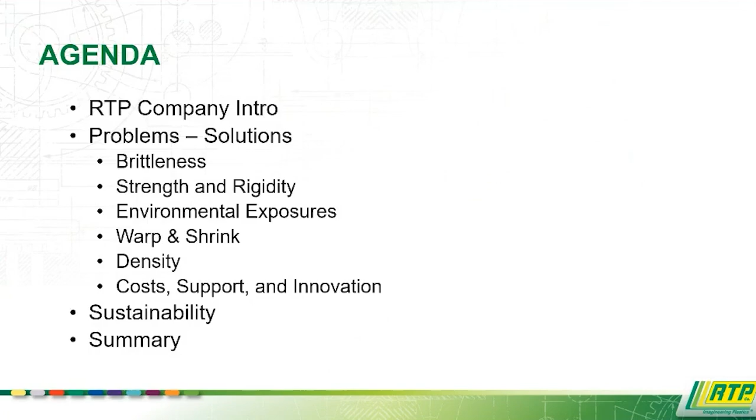So first, a little bit about RTP Company for those that don't know us. We're a global compounder of custom engineered thermoplastics with approximately 1,800 employees and $1 billion in sales. Unlike some of our competitors, we are an independent, privately held global company.

This is important, and here's why. As an independent company, we can be completely objective when looking for raw materials, formulations, and solutions to meet your requirement. In doing so, we're able to provide you with the best thermoplastic material for your application at the best cost. Being a privately held company is another important distinction.

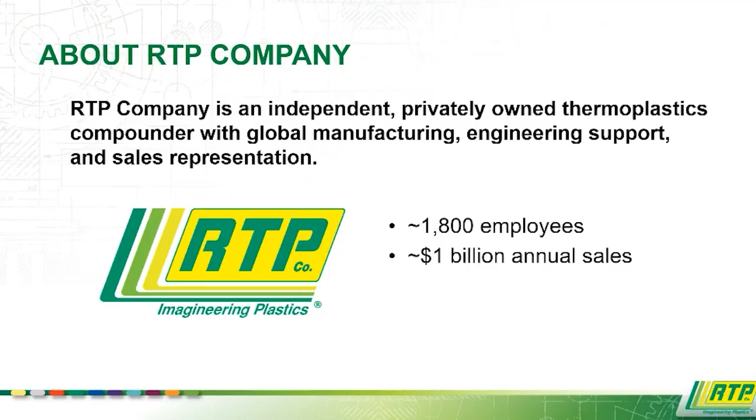Rather than making short-term decisions to meet short-term goals, we're able to take a longer range view when making decisions. And last but not least, being a global company, we're committed to serving our customers all over the world and well into the future.

We work in every thermoplastic resin besides PVC with hundreds of modifiers to develop the right solution for the application. We sell more than 9,000 different types of compounds each year in pellet, sheet, and film formats. And of these, roughly 1,750 are new formulations.

Our roots are as a highly technical specialty compounder. And while we still hold on to those roots, we've really become a full-service supplier for anything from something like a highly specialized nanotube PEEK to a high-volume commodity material like talc PP that we can compete with anyone on costs.

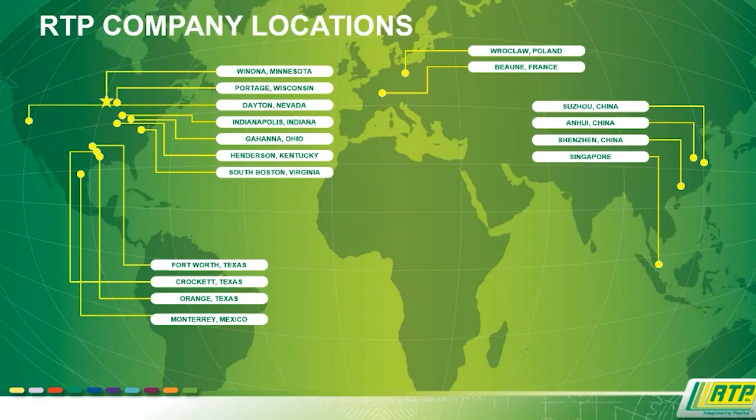With over 20 production plants and even more sales offices located around the world, we are well equipped to serve you with consistent thermoplastic materials wherever your facility or facilities may be located. In fact, we have more than 2 million square feet of production space around the globe with hundreds of extruders and millions of pounds of capacity. Each region can produce the entire thermoplastic compound line in pellet form, and each facility provides prompt local service.

This is a slide from our corporate presentation, but it really resonates with me personally, and I'll tell you why. We are a family-owned, customer-centric company, and it still very much feels that way, even though we've exceeded $1 billion in revenue. And by focusing on our customers' needs without a lot of bureaucracy or red tape, we can respond quickly and effectively.

So I know that's true because of my time as a product development engineer. If a new application or technology or problem came across my desk and I wanted to go do some R&D or development work, it was just simply a matter of me formulating, scheduling time on the extruder and going down there and running materials, playing with materials, and figuring out problems. And we still operate that way day to day.

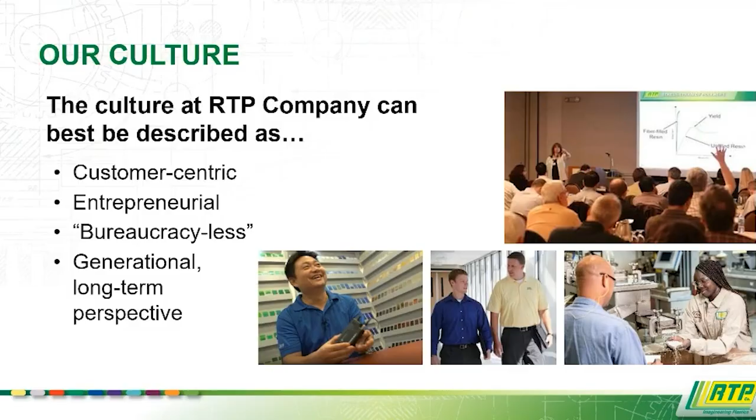We're a very flat organization. When we have a problem in front of us, we have a lot of freedom to go in there and get it done, whether that be on the R&D side or the business side. We really want to get a solution to our customers as quick as possible.

Simply put, we serve literally every market where thermoplastics are used, from mission-critical parts going into space to very basic low-cost parts. If thermoplastics are being used, we're probably there. That means we've pretty much seen it all and can carry that expertise across all markets we service.

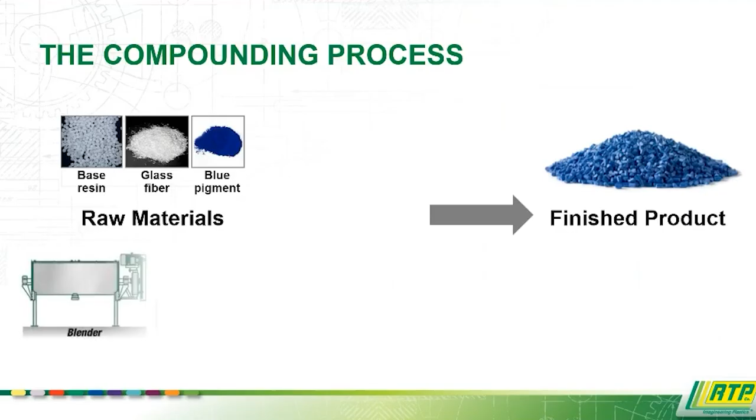I've mentioned compounding compounds a couple of times now, so before we get into it, let's take a quick look at what I'm actually talking about with those terms and what we do as a compounder. So you'll see here a range of raw materials. Let's say we have a base resin, a base polymer. What we're going to do is take that and mix it with additives, put it through an extruder, cool it down, pelletize it, and send it out as a finished product.

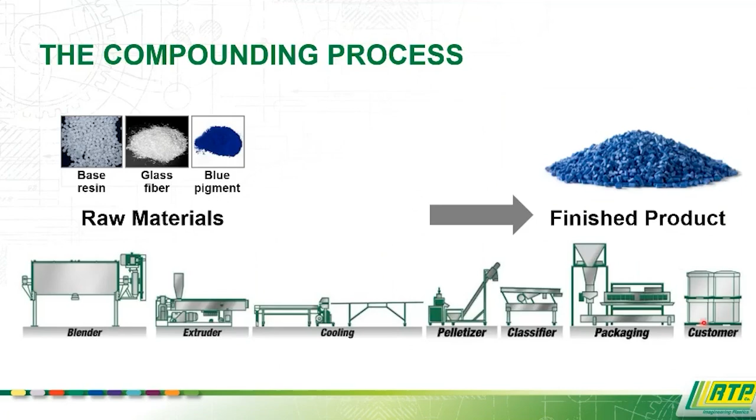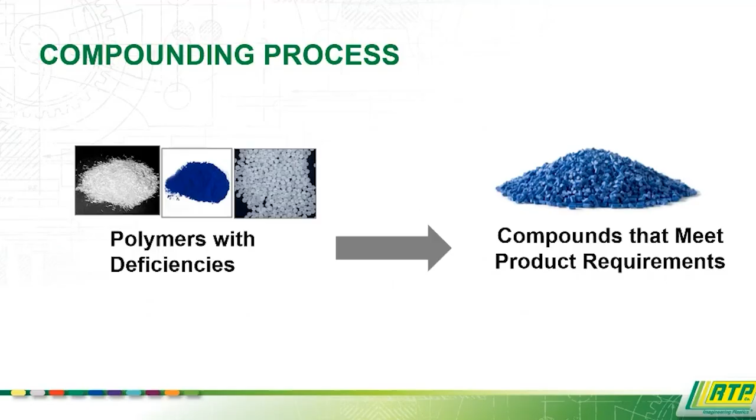But if we take that previous slide and break it down, what we're really doing in the compounding process is simply using various additive technologies to improve deficiencies in neat or virgin polymers to provide a compound that meets all the requirements of a given application. It's a pretty simple concept, but the breadth of technologies involved is not simple at all.

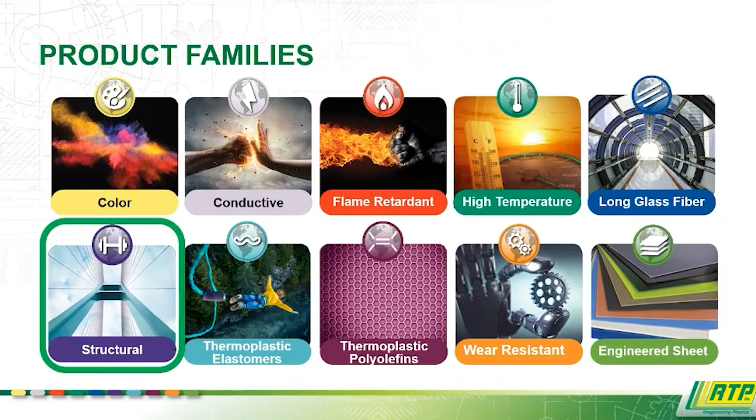As such, RTP Company is organized into product families according to their general attributes and the technologies involved. That includes color, conductive, flame retardant, high temperature, long glass fiber, structural, TPEs and TPOs, wear resistant, and finally our sheet division. Today's focus will be primarily structural compounds with a quick mention of some high temp in there.

Now that I've introduced RTP company, let's pivot to some of the problems commonly encountered in the tool space that can be solved by working with RTP's structural product group. Those issues include brittleness, flexing, low strength, warp and shrink, environmental issues, comfort, and finally costs and innovation.

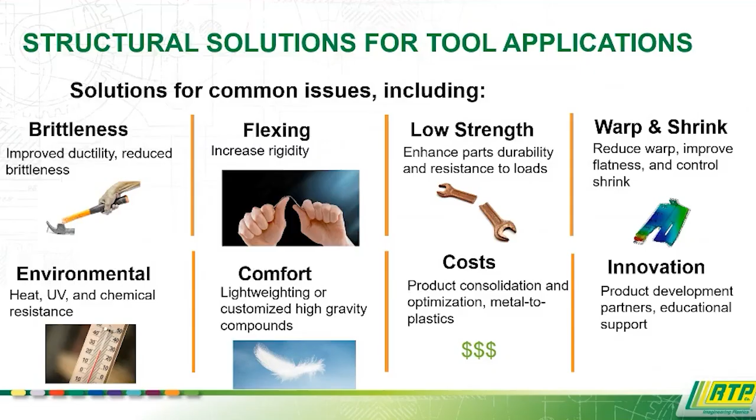In keeping with the tools theme, let's dive into the toolbox of additives and technologies we use in the structural group to address those common material problems. We have modifiers, which we break down into impact modifiers and polymer blends. And we have fillers, which I break down into mineral or low aspect ratio fillers and fiber reinforcements, or high aspect ratio fillers. I'll go into those terms and technologies in more detail as I go through this presentation.

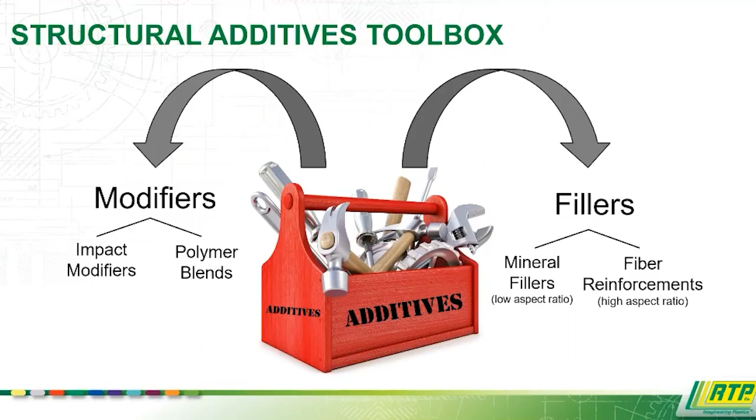First, I need to quickly explain the concept of aspect ratio. Aspect ratio is simply the large geometry divided by the smaller geometry of a filler. The general rule of thumb is as the aspect ratio goes up, the reinforcement property of that filler is going to go up as well. This term will come up a few times, so keep that concept in the back of your head.

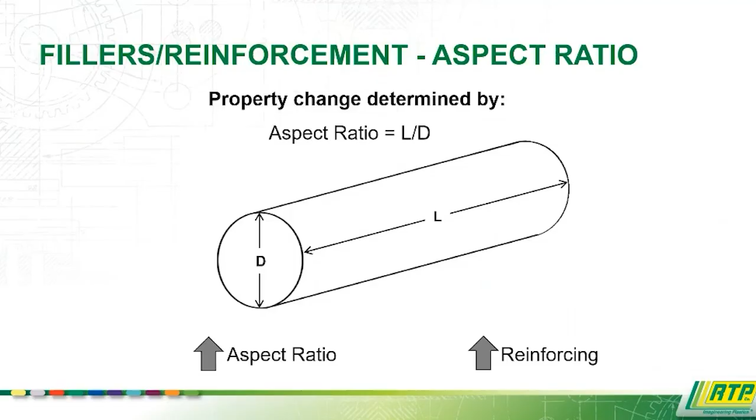Now let's start looking at the common issues you see with tool components. First up is brittleness, or general lack of impact resistance. This is the failure to survive a high force over a very short duration. Impact resistance is an inherent property of polymers, which is also dependent on many things like temperature and part design. But fortunately, there are things we can do to improve upon that characteristic.

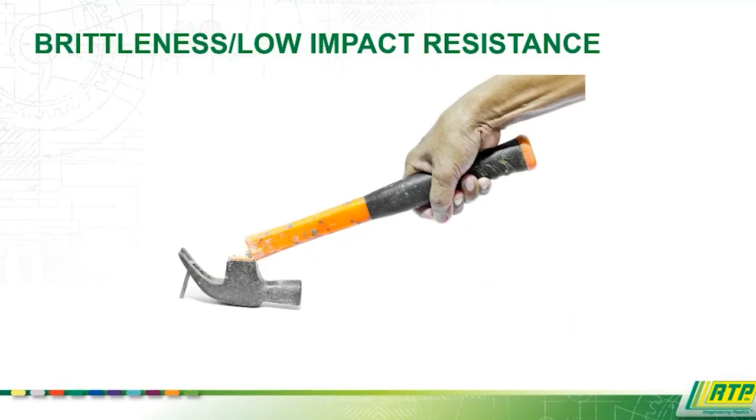And that is the addition of impact modifiers. Impact modifiers are just what they sound like - modifiers used to adjust the impact resistance of polymers. Impact modifiers are specific to the host polymer they're going into, to increase the ductility across those polymers. Very commonly done in nylon - that's probably the most common, but it can be done in pretty much any semi-crystalline resin, including PBT, PPA, PPS, and even some amorphous resins.

You'll improve that impact performance at all temperatures when you incorporate impact modifiers for the most part, but sometimes they're specifically used for low temperature impact improvement, because as polymers get colder, generally they get more brittle, and that can be a big problem. You do get the side benefit often of a reduced specific gravity.

So if we look at a common material that's impact modified, like I mentioned, nylon 6,6 is probably the most ubiquitous out there. If we look at what that looks like in an impact modified version under our RTP 200H, your notched IZOD impact goes from only around 53 joules per meter to 961. So a dramatic, almost 20-fold increase in your impact resistance.

There is a downside where when you use impact modifiers, your strength and stiffness will go the other way and generally reduce. As the saying goes, there's no free lunch in plastics, but a lot of times that can be counteracted with other things like fillers, which I'll get into. And I did mention you do get that extra benefit of reduced specific gravity, so that means more material for your money.

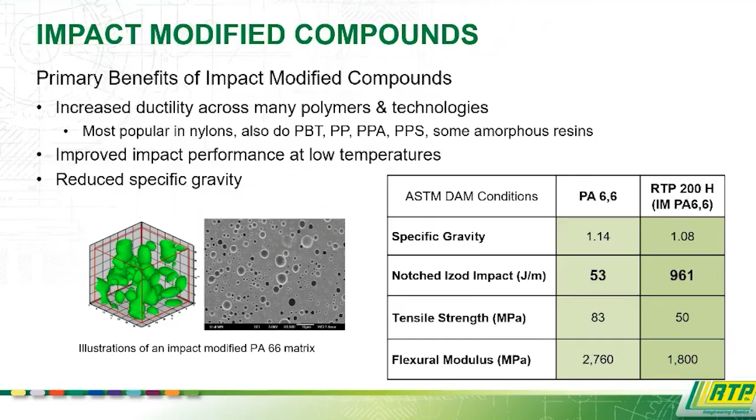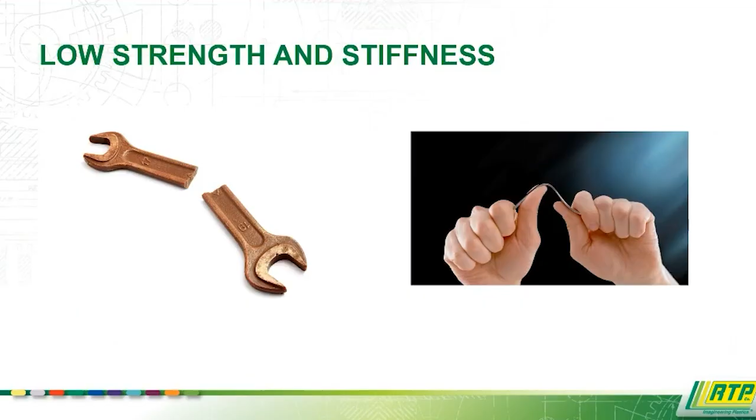Moving on to what might be the most common fault that we address in the structural group, and those are low strength and stiffness. Basically, material is not strong enough to survive the load that is applied, and/or flexes too much as a result of that load.

The workhorse technology used to address low strength and stiffness, which anyone familiar with thermoplastics is well aware of, is glass fiber reinforcement. Glass fiber is used in various forms in thermoplastics, but the form we use the most is short glass fiber, otherwise known as chopped glass fiber. Glass fiber improves on a range of properties, including strength and stiffness, creep and fatigue resistance, and even impact resistance in the case of less ductile polymers.

Glass fiber can also substantially increase the usable temperatures of polymers, especially in semicrystalline polymers, by improving those mechanical properties at elevated temps. A lot of times it's measured in something you see as HDT, or heat deflection temperature.

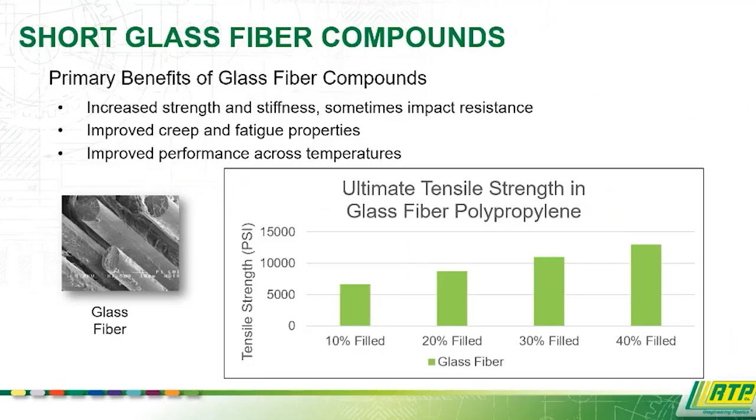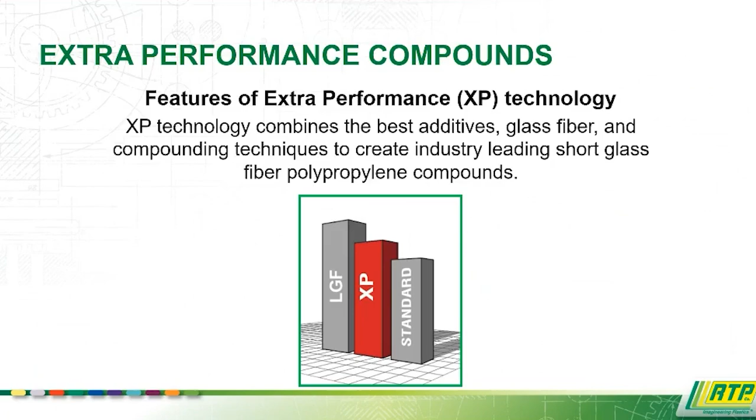While glass fiber compounds are widely available, something more unique to RTP Company is our Extra Performance, or XP, glass fiber polypropylene product line. We've combined the latest glass fiber additives and compounding technologies to provide industry-leading short glass fiber polypropylene compounds.

XP compounds exceed the performance of traditional short glass fiber polypropylene and even approach the performance of long glass fiber polypropylene in strength and stiffness, as you can see in the graphs, with the standard in blue, the XP in red, and the long glass fiber in green. This is tensile strength, and this is modulus, or stiffness.

XP really bridges the gap and approaches the performance of long glass fiber, but does it in a short pellet, which aids with ease of handling and a bit lower cost. Now, if impact resistance is your primary goal, long glass fiber is still going to be your best bet. But if you're just looking for a boost in strength and stiffness versus standard short glass fiber polypropylene, XP is a great product for that.

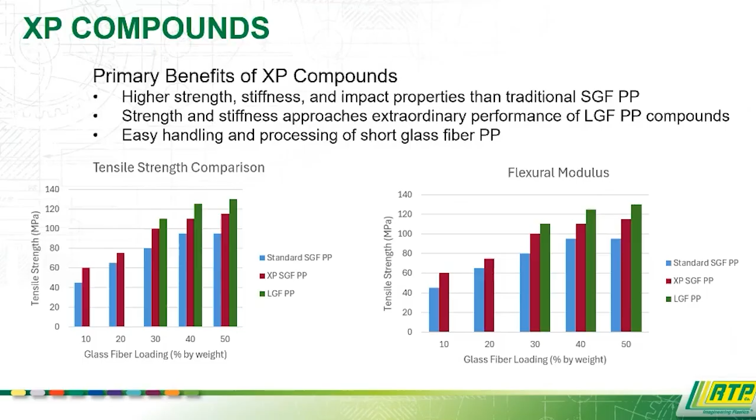So those are some common basic issues and solutions encountered involving mechanical properties, but there are plenty of other material properties that can result in part failures based on where the part lives. Those environmental factors include chemical resistance issues, UV exposure, and elevated temperatures, each causing degradation in different ways, thus requiring different solutions.

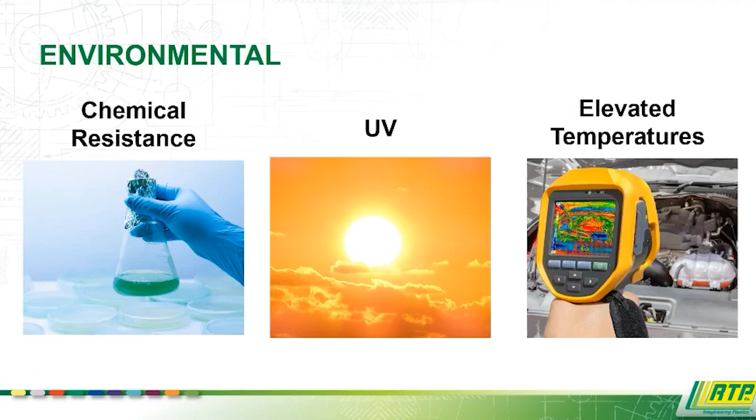Chemical resistance is a property inherent to each polymer and chemical involved, so the best solution to chemical resistance issues is to specify the correct base polymer up front based on what kind of chemicals the part might see. That's not always straightforward depending on the requirements or what you may or may not know going into the application. But one option we have to address chemical resistance is in the form of polymer blends or alloys. In alloys, what we're doing is combining attributes we like in two different polymers and mixing them together.

So let's take PC PBT, for example. The PC brings toughness and dimensional stability, while the PBT brings chemical resistance and improved flow. So let's say we like the properties of polycarbonate—it's very tough, dimensionally stable, but we're concerned about some chemical resistance issues. We can bring in some amount of PBT into that alloy to boost those properties and also help flow.

On the other hand, if we like PBT—it's got good chemical resistance and good flow, but we're maybe having some warping issues—we can introduce some amount of polycarbonate to improve the dimensional stability there. So in alloys, what we're trying to do is take things we like about two different polymers and bring those out into one compound.

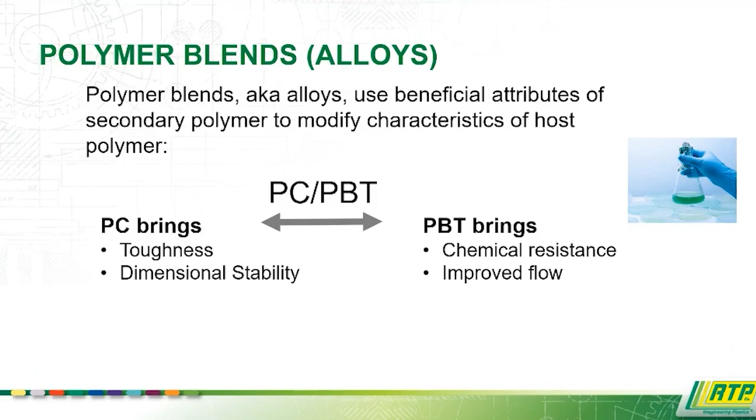Next up is UV exposure, causing polymer degradation, which manifests in reduced mechanical properties and color shift. We have two ways of addressing that: UV absorbers and HALs. UV absorbers protect the polymer by absorbing UV before it starts the degradation, and HALs protect the polymer by stopping the degradation once it's started.

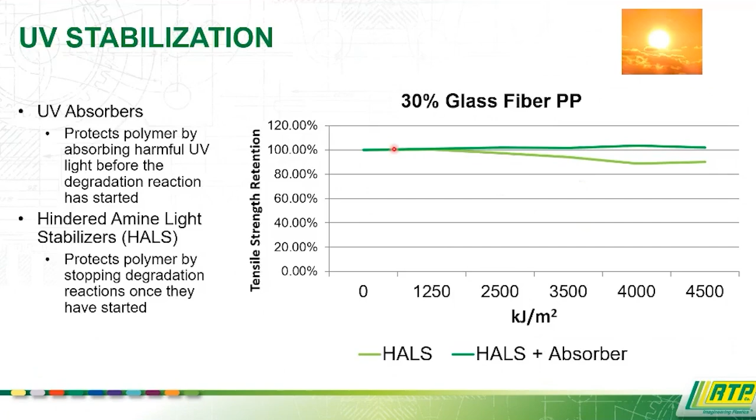A good way I've been told to think about this is the UV absorber is the sunscreen and the HALs is the aloe—that's really what we're doing to try to protect polymers. See in this graph, 30% glass fiber polypropylene: when stabilized with HALs, it will start to drop off a little once we get into extended accelerated weathering, while HALs and absorber together will maintain those properties even further. I don't have a non-stabilized sample, but you'd see a steady drop once you get out in those properties.

The last common environmental cause of part failure is elevated temperatures. Elevated temps need to be separated by duration, as there are two very different things at work. Short term takes into account the changes in material based on the shift in mechanical properties of polymers at elevated temps. So basically, as thermoplastics get warmer, the polymer chains move more freely, and that generally pushes your strength and stiffness down.

So if we take a look at what that looks like—for example, a stress-strain curve—this 30% glass fiber polypropylene at negative 40, we have on the y-axis the tensile strength, basically. It's very stiff, pretty strong at negative 40. Now let's move to room temperature.

Our stiffness, or the slope of this line, goes down. It fails at a lower stress, and so on as we move into higher temperatures. Those properties are generally directly related to temperature and will be transient, meaning there's not a permanent change to the material, whereas long-term is actual degradation of the material itself due to prolonged exposure to those elevated temperatures.

So take this visual here. We have glass fiber nylon 6. It's been heat aged at 150 degrees C for 1,000 hours, and you can see these nice, clean, natural bars have started to undergo some form of degradation, starting to discolor. You'll see some embrittlement happening with that.

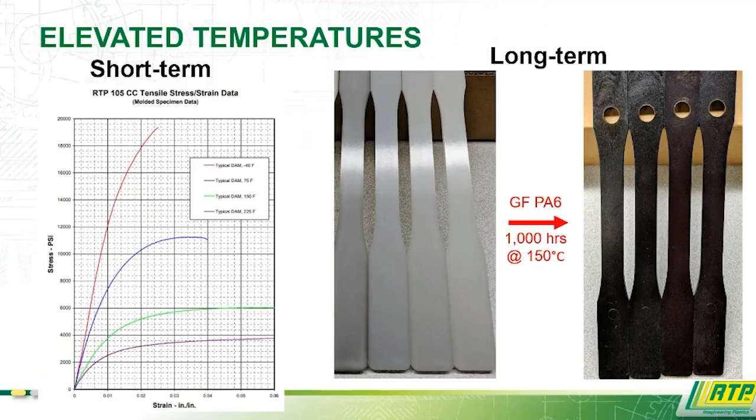Fortunately, like UV, we have additives that can be used to stabilize polymers against the reactions that occur from long-term exposure to high temperatures. There's a huge variety of stabilizers out there used specific to the various polymers and stabilization goals, which is really beyond the scope of this presentation, and frankly, my mechanical engineering background. But the point is that we have the ability to greatly reduce the long-term degradation of polymers at elevated temperatures with heat stabilization technologies. Again, some numbers to prove that out.

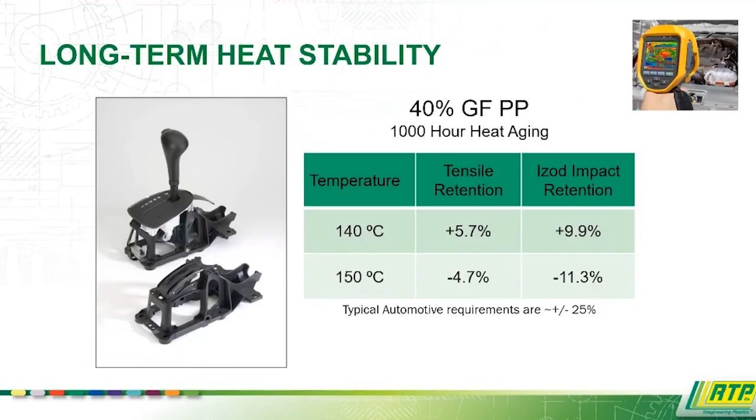So you might briefly recall I mentioned a high temperature group earlier. Well, on the subject of temperature-related issues, it's a good time to talk about our high temperature compounds, which are based on resins that perform well in extreme temperatures. We compound those resins with the same additives and modifiers to further enhance their properties, making them ideal for plastic parts that are used continuously in high temperature conditions, which will address both the short-term and long-term thermal issues of some of those other lower temperature polymers.

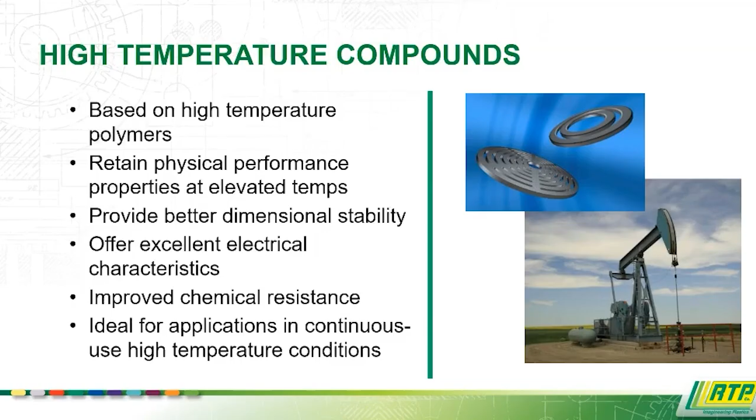Those compounds are great options when both short and long-term properties of the material must be maintained in an application. So for your more high-end demanding applications, we do have a lot of good high-temperature compounds to offer that address those things. A lot of times you get added benefits of good chemical resistance, good electrical characteristics, and some other things. But you're generally going to pay extra for those types of polymers.

Okay, so we've reviewed a lot of problems and potential solutions. Let's take a quick look at how these might be applied in the real world and why. Let's take a look at a power drill. For this exercise, I'm not necessarily implying there's only one solution that's best in all cases, but more of an application of these technologies I've been talking about to sort of tie it all together.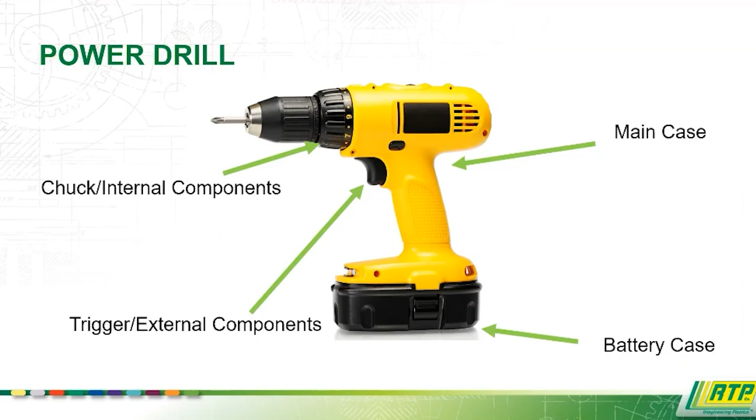So for the main case, what we're going to need is good aesthetics. We want it branded, usually to whatever brand color, so pre-colored and glossy, with a nice surface finish. It needs to look good sitting on that shelf. We need that material to be strong, stiff, and impact resistant. It's really going to take a lot of the brunt of the abuse, and with that, it's going to get scratched and scuffed up, so we want it to be pretty resilient to that. Obviously, good chemical resistance is important because you never know what could be getting on there. And then we can potentially UV stabilize that if we think it's going to be seeing a lot of sun, being left outside, whatever.

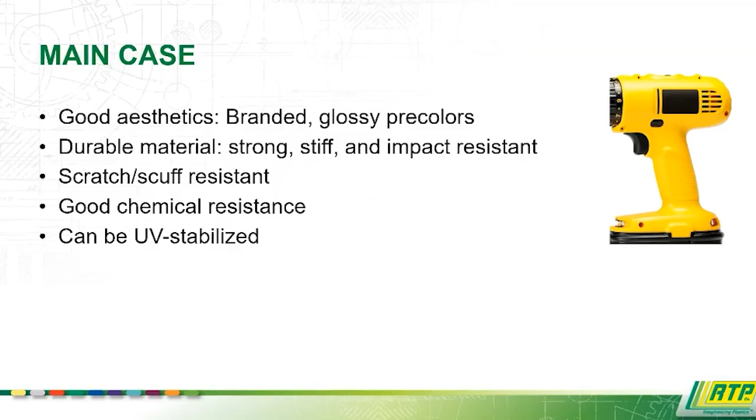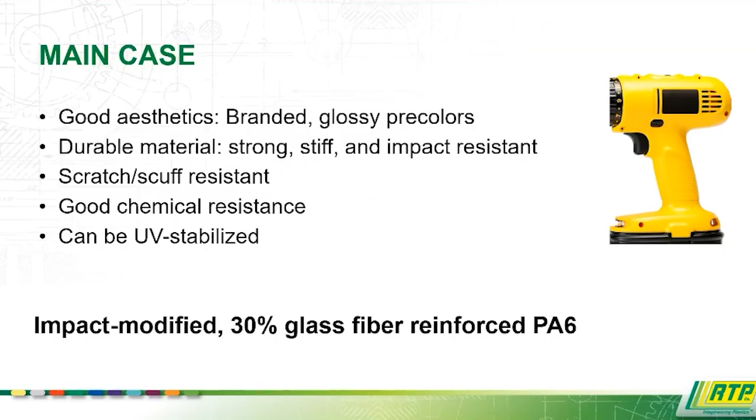So what would be a good material there would be impact modified 30% glass fiber reinforced nylon 6. That nylon 6 is going to give that good scuff resistance and glossy finish. The impact modifier helps with the impact resistance, and then the glass fiber gives that strength and stiffness. To break this down a little farther, we really have two options that are very common in this type of application. I talked about the impact modified glass fiber nylon 6. We also have a product RTP 205 A HB, which is a 30% glass fiber nylon 6 without the impact modifier.

I want to talk about this because it has a UL 94 HB rating and an elevated RTI rating with UL. Sometimes that UL RTI rating is going to be required for your product, and that's not an easy rating to achieve. So if you're looking for that in a case-type application, this is a really good option. You do lose some impact resistance with this grade, but it's still quite strong and stiff, and just a good overall durable material.

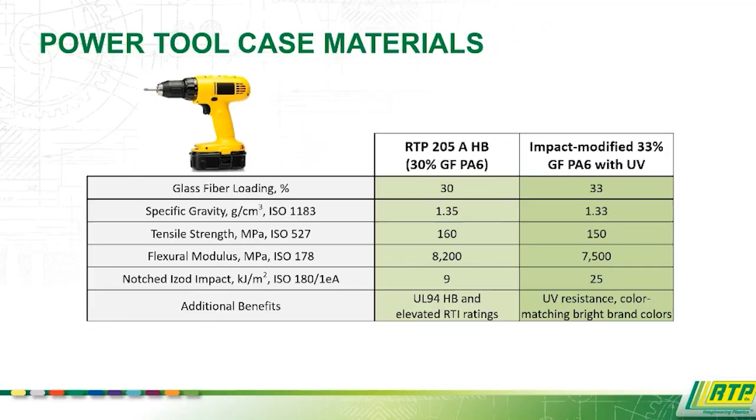Next, let's look at chuck or internal components. For example, in this component we want it to be very strong, very stiff. We need really good wear resistance with parts rubbing on each other potentially. These are more sensitive to geometry, so we're a little more concerned about dimensional shift or water absorption we might see in something like nylon 6. And maybe some of these components are getting quite hot, so we want more high temperature performance.

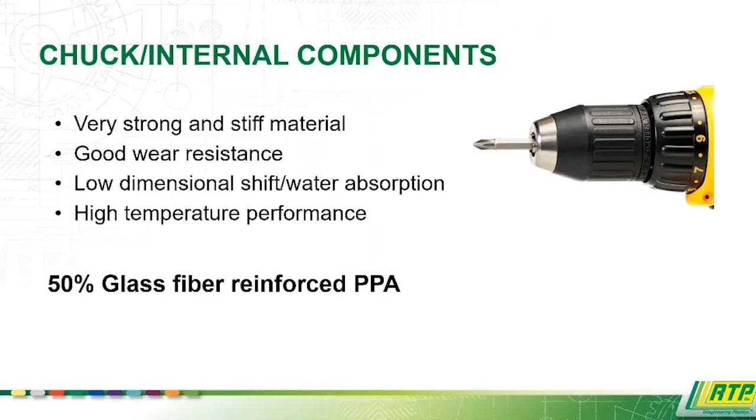We might look at something like a 50% glass fiber reinforced PPA. That PPA is basically a more high performance nylon - an easy way to think about it. It absorbs less moisture, has higher heat resistance, is very strong and very stiff, and we add that 50% glass fiber to further stiffen and strengthen it up.

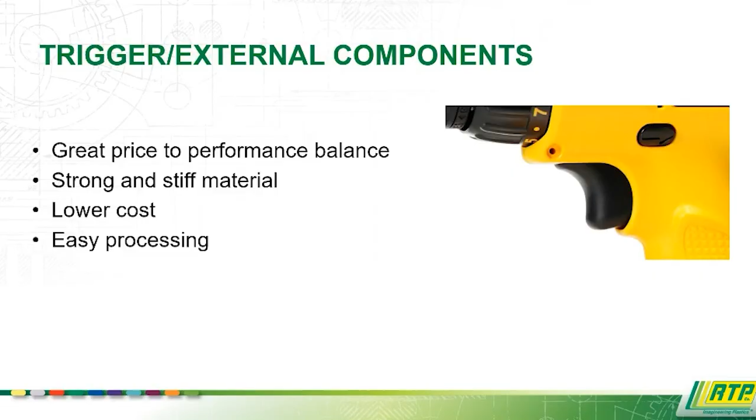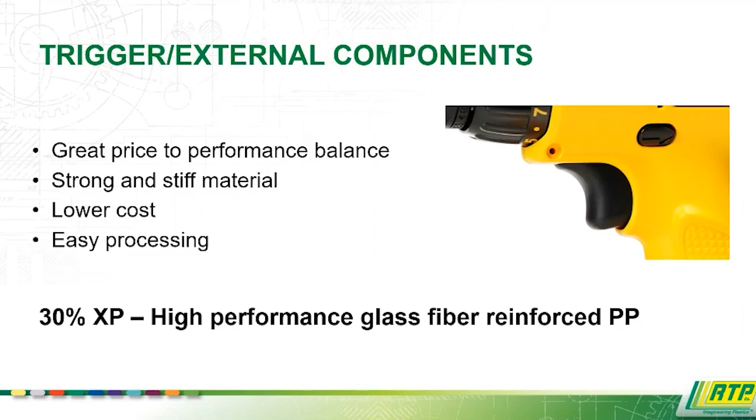Moving on, a trigger or other similar external components - not as critical, maybe not taking quite as much abuse. So we're more concerned about price and performance, even though it still needs to be strong and stiff, and we just want a lower cost option. Again, maybe we could look at something like that 30% XP I talked about earlier - a high performance glass fiber reinforced polypropylene.

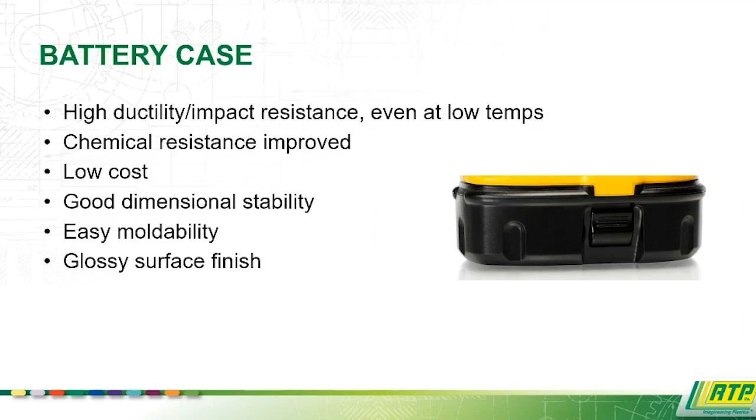Moving on to the battery case. With that, we want a high ductility, high impact resistant material, even at low temperatures. The thing could be getting dropped, it's taken in and out of the tool. Again, we're going to want some chemical resistance there. We're going to be worried about cost. We want good dimensional stability so it's able to fit in and out of that tool consistently. And then we want it to look good, of course.

So we can look at something like an alloy being a PC ABS. They're very high impact resistance, cost effective, good finish, very common material used for battery cases and tools.

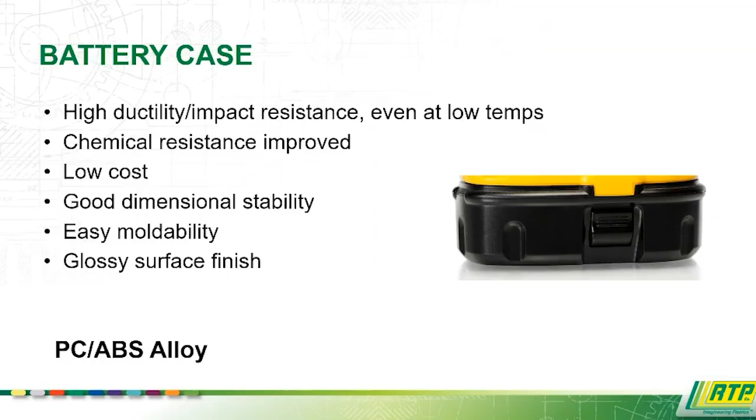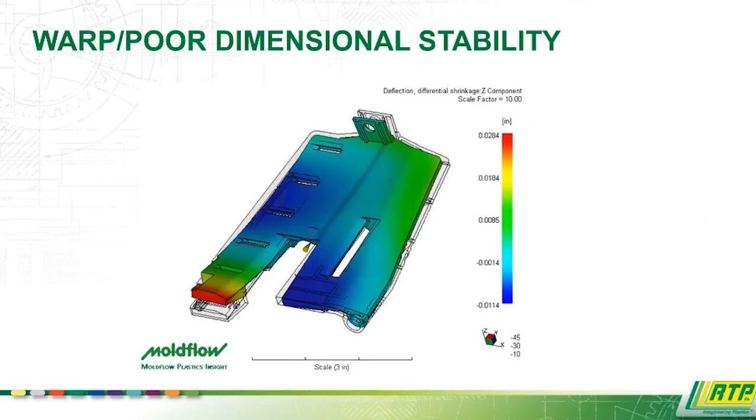So now all these attributes are great, but none of them really matter if the part is out of dimension or doesn't fit. Unfortunately, warp and shrink are some of the most common issues we see from all customers, and we often see it after a mold has already been cut. Ideally, the proper work should have been done up front with modeling, shrinkage, and design of the tool, but that doesn't always happen, or material is just prone to poor dimension. So let's take a look at some causes and solutions to that.

First, we were talking earlier about those high aspect ratio fillers, good for reinforcement, things like glass fiber. That's great, but one of the downsides is they actually tend to introduce warp - anybody familiar with working with glass fiber reinforced products has probably run into this. What's actually happening is when the material is injected into a part, those fibers or whatever filler we're using that has any aspect ratio want to align in the flow direction. What happens there is the shrink in the flow direction is reduced more than the shrink in the cross flow, so we have a differential in shrink. And when there's that differential in shrink, we get warp - see potato chipping, it's commonly referred to - and just a lot of problems that come up with that.

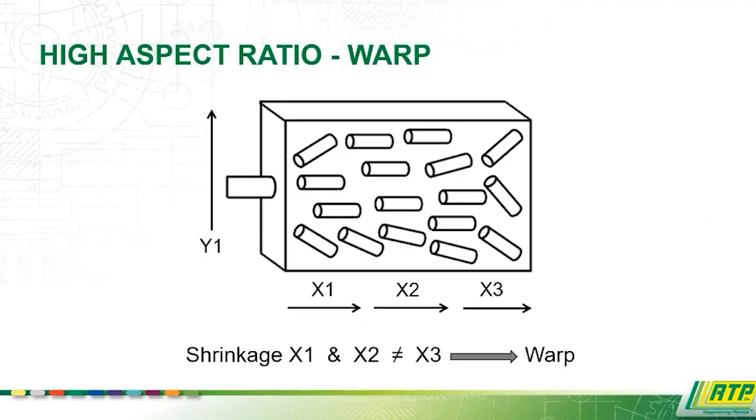So on the other hand, we have things like low aspect ratio fillers, which I've mentioned, and those come in the form of minerals. Common minerals are going to be calcium carbonate, talc, mica, and I include things like glass beads and milled glass fiber in with minerals, mostly just because they're all low aspect ratio and they're all trying to accomplish the same thing - bringing your shrink rate more in line with what you want.

So I mentioned when you have the reinforcements, your flow versus cross flow gets affected. What these low aspect ratio fillers do is actually reduce that differential in shrink and give flatter parts. So with those types of low aspect ratio fillers, you get improved dimensional stability. A lot of times minerals are going to be low cost, so you actually can pull some material cost out, and a lot of times you'll actually get an increase in stiffness depending on exactly which mineral you're using.

So take, for example, some different semi-crystalline resins with 30% mineral - you can actually get around a 2x increase in your stiffness with that, along with the benefits of the dimensional stability.

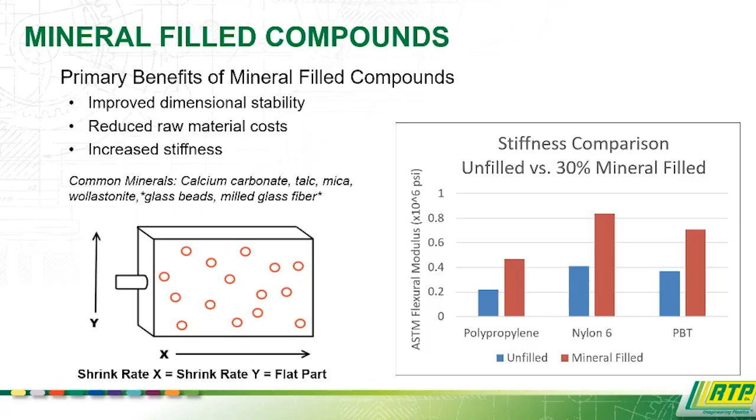So if we take those two and combine them—say we need a combination of strength and stiffness that glass fiber brings, but a relatively flat part—we can take a low aspect ratio filler like mineral and combine that with glass fiber reinforcement to get the best of both worlds. It's a very common approach to address warping or improve dimensional stability in a material.

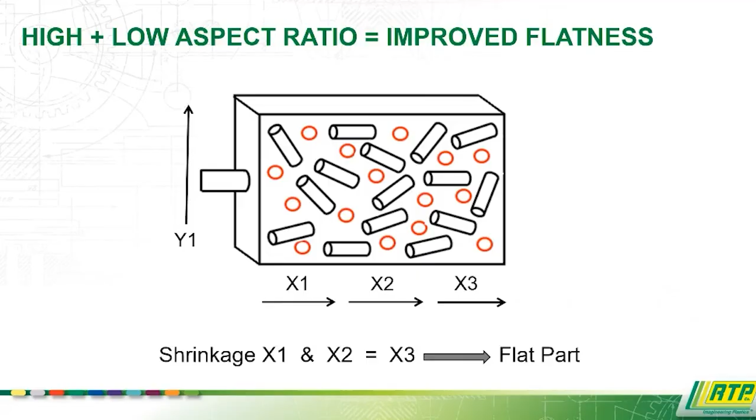A little different approach is our low warp glass fiber reinforcement. That's really useful for when you can't sacrifice the properties you get when you have to combine with a mineral.

Example: here's filled nylon 6, 40% standard glass fiber. You're going to have a tensile strength around 179, but if you move to a mineral combination, you're going to lose quite a bit of that—same with the stiffness. What we can do is introduce this low warp short glass fiber and maintain most of those properties while still improving dimensional stability.

These plaques are actually from my R&D days. I did a study using this low warp glass fiber technology where I could drop in back-to-back lots of 40% nylon 6—these are 6x6 plaques. The standard plaques would come out all warped and potato-chipped; moving to that low warp short glass fiber, they went back to flat again. It was really pretty amazing.

The downside is you do pay extra for that, so it's not necessarily the go-to technology for high volume applications. But if you're really sensitive to dimensional stability and need all the strength you can get with glass fiber, it's a good, interesting option.

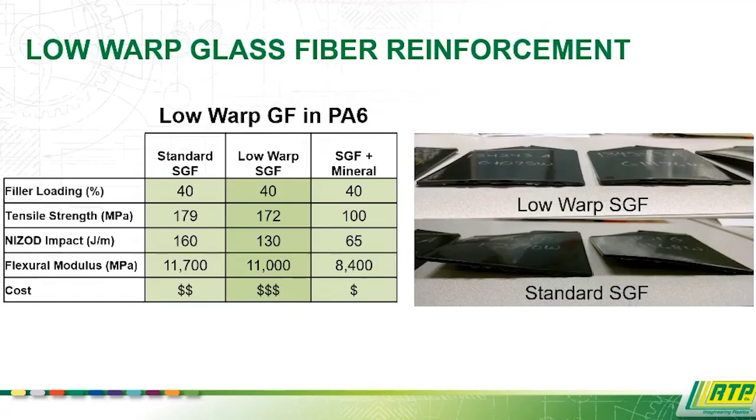So if we look at all the low warp solutions we have, generally you're going to want to start with amorphous base polymers or an amorphous alloy, kind of like the PC/PBT I was talking about. But we can still achieve good dimensional stability with semi-crystalline materials, and we do that through the use of those fillers I mentioned—low warp glass fiber or low aspect ratio fillers like glass beads and minerals.

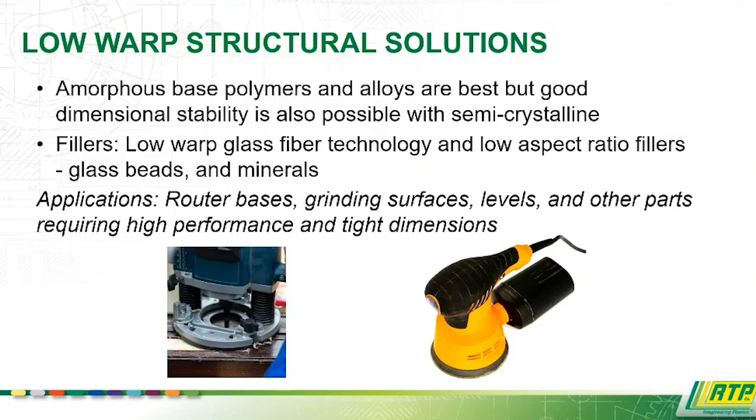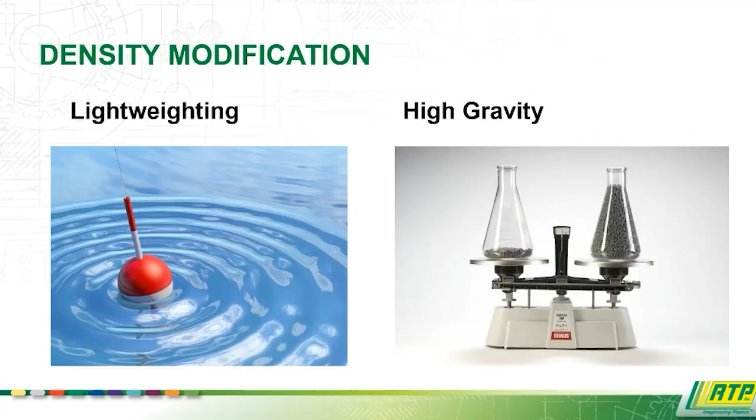The next topic we'll look at is density modification, which really equates to making tools that are comfortable and safe to use. Both lightweighting and adding weight, or high gravity as we call it, have their role. Making heavy tools lighter saves energy and increases comfort, and increased density can be selectively used to shift center of gravity for better balance or vibration control.

We do focus a lot on lightweighting at RTP Company. I think we have as broad a range of solutions as anyone. I'll talk about those—includes glass bubbles, our light and tough compounds, carbon fiber, and an easy way to make a part lighter is to switch it from metal to plastic.

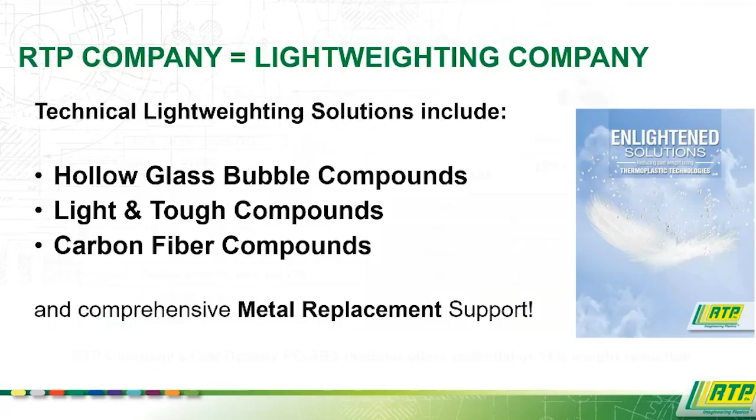First, glass bubbles. These are just hollow glass bubbles, so they're very lightweight—they're filled with air. If you're looking for the maximum reduction in density where properties aren't so critical, hollow glass bubbles are really your best option for that.

We can see in a standard PC/ABS, you take out 14% of the density, going from 1.14 to 0.98. But again, you do lose some tensile strength and get a big drop in impact resistance. Hollow glass bubbles do have an advantage over something like a chemical foaming agent, a CFA, which is wall thickness dependent and doesn't process well—it's hard to make work right.

Once you have these bubbles in a material, you really don't have to think too much about it—they're just processed in there. You get good surface finish, and you don't have to mess around with your injection molding settings and all those things that are problematic with CFA.

There's, of course, things we can do if we wanted to bring some of the impact resistance back—talk about modifiers and things like that. So there are ways to dial in those properties if you're really looking to reduce density as much as possible.

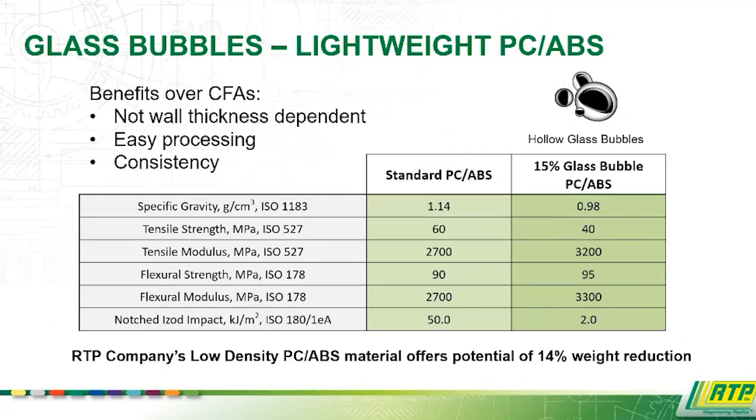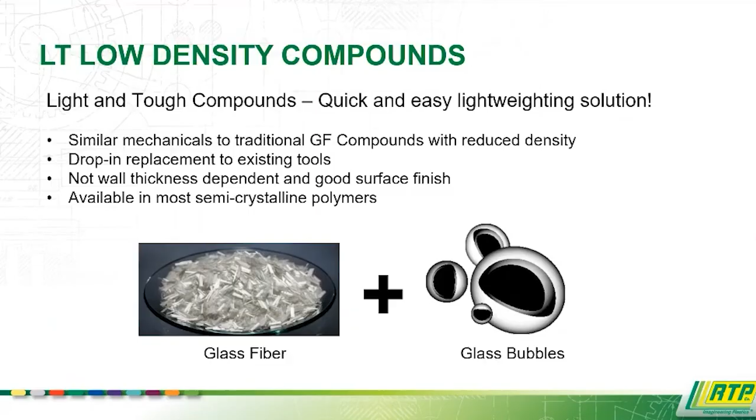If your part has more demanding structural requirements, we can combine glass bubbles with glass fiber in our light and tough compounds. It's a quick and easy way to lightweight a glass fiber material you're already using. It can basically be a drop-in replacement for whatever glass fiber reinforced compound you're using. Again, it's not wall thickness dependent, and has the same shrink, so you don't have to mess around with any of that.

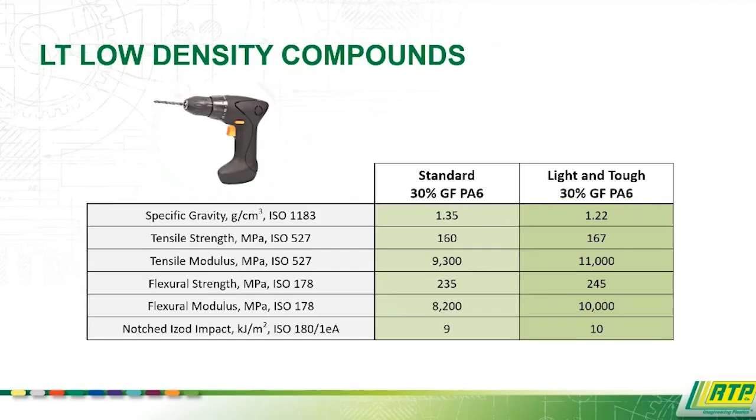If we take a quick look at the properties, here's a standard 30% glass fiber nylon 6, and then a light and tough 30% glass fiber nylon 6. We can get around an 8 to 10% density reduction and basically maintain all the mechanical properties with a material that drops right in. There's a little bit of added cost with the light and tough materials, but a lot of times the reduction in specific gravity offsets that cost increase, so you can get about a 1-to-1 price on a part with reduced specific gravity and similar performance. Some interesting technology to consider.

Then the last lightweighting technology I'll talk about is carbon fiber. Similar to glass fiber, it's a very good reinforcement, but it's stronger, stiffer, and lighter than glass fiber. It's only available in black, so that's one of the downsides - if you need a colored material, that's not an option. But if you're looking for strictly high performance, low weight reinforcement, carbon fiber is your go-to.

Again, we'll take a quick look at some numbers. Here's a 30% glass fiber nylon 6 compared to a 30% carbon fiber nylon 6. You get a reduction in density, a big boost in tensile strength, a huge boost in modulus or stiffness, and similar impact performance. So right off the bat you get a reduction in gravity, but with the added properties, a lot of times you can thin wall, take some material out, and reduce the weight of that part even further. Carbon fiber is quite a bit more expensive than glass fiber, which is why glass fiber is the workhorse. But if you're really focused on performance and weight, it's a very good reinforcement.

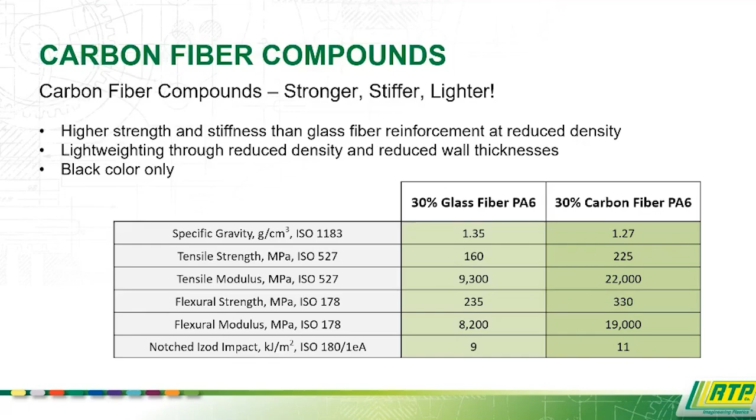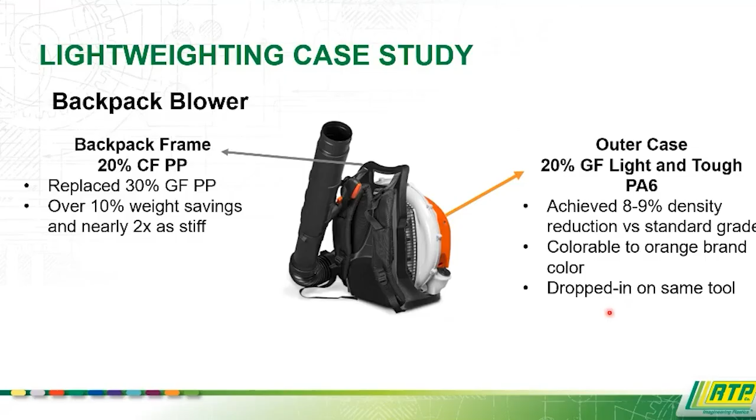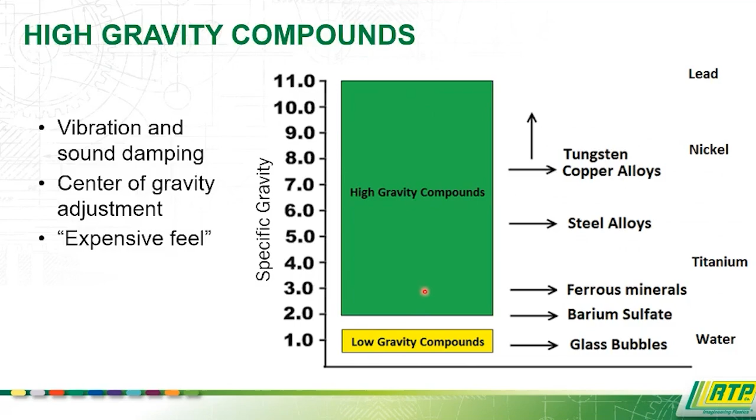As I mentioned, we can actually use higher density to accomplish some things, including vibration and sound dampening, center of gravity adjustment, and sometimes just giving an expensive feel. Probably not relevant with tools, but maybe there are applications where a tool feels cheap and you actually want to add some weight - high gravity compounds can do that. This chart breaks down the range of densities we can achieve: 1 being the density of water, 11 being close to lead. Our low gravity compounds can get below 1, and we can go anywhere up to basically the density of lead with these high gravity compounds, using various filler technologies.

So that wraps up the more technical side of the presentation, but there's a lot more than just the material side of issues common in the tools market. Those have to do with things like economics, efficiency, innovation, and seamless production. So I'd like to jump into how our RTP company can support you on that side as well.

A very common issue we've seen with tool manufacturers is trying to wrangle all the different locations and materials into a streamlined portfolio of standard products. Often one location is using their own group of materials, another location using a group of similar but different materials, maybe different supplier, different grades. That could be true with the design team, the engineers, the molders, whatever. And what that results in, with all the different grades and different locations, is a design and logistics nightmare.

We're a global company. We have global account teams to help tie those things all together. What that really looks like is we can reduce suppliers and material grades, and we can do that in local production, as I mentioned.

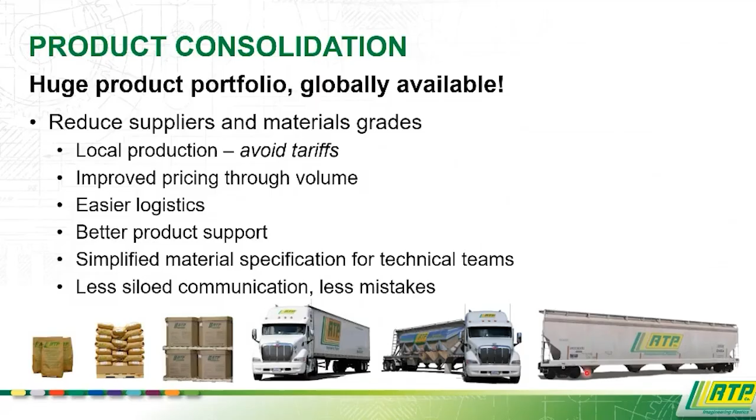Kind of a new hot topic of recent is tariffs, so when we have local manufacturing, sometimes we can get around some of those issues. When you reduce the amount of grades you're using, you can leverage that through improved pricing. Obviously easier logistics, easier product support. It's easier for the technical teams to know what to design with when they have a consistent group of materials to choose from, instead of everyone trying to reinvent the wheel all the time. And we see that just manifest in a lot less mistakes because there's better communication, and we have the team to really help tie those things together. Saves a lot of headaches for some of the larger companies we work with.

Along with sales support, we have engineering support in each region as well. Having local engineers available to visit customers results in a lot quicker problem resolution. Additionally, local engineers work with and maintain a good understanding of the local raw materials, and that results in a safety of supply and competitive pricing by just using things that are locally available and that's cost effective. For example, during the COVID supply chains, not having to ship things all over the world really saves a lot of that risk.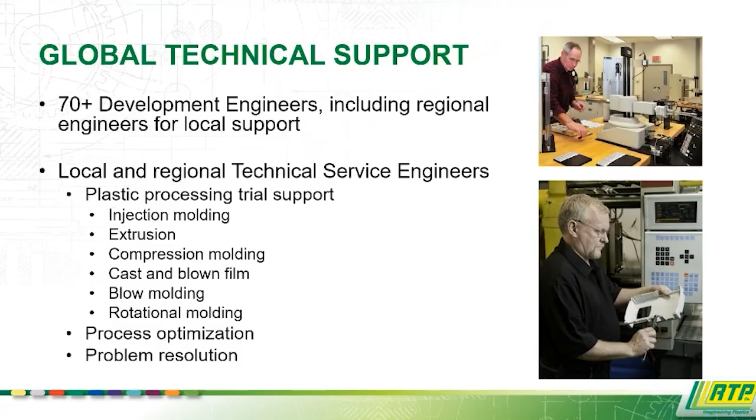Along with that, we also have a field of tech service engineers. I consider our tech service engineers really the unsung heroes of the company. These are the guys that are going to go in at tool trials, mold trials, ramp up, production issues. They're going to be our eyes and ears on the ground. They're going to help diagnose improper settings with injection molding, mold and tool issues, and corroborate issues. For example, if there's a lot issue at a customer, they can corroborate maybe there is an issue with that lot, or they can say this is not a material issue. These guys just are invaluable, and we love to have these guys supporting our customers throughout the whole process and get them into seamless production settings.

Part design is another overlooked area where costly mistakes can happen. It's much cheaper and faster to get things done the right first time around than to try to fix the problem down the road. So we can go in, help diagnose any issues with parts, but we can also find parts that might be a good option to do a metal to plastic conversion, optimize the plastic design. Let's say we've identified parts, or you've identified parts, we do have a CAE support team that can start to do things like mold flow, look at your part design and say if we get there, we're going to have issues. Just all the things up front that are entirely too often overlooked and cause problems. Getting us involved early will help avoid those issues, and we love to partner up to do things like that.

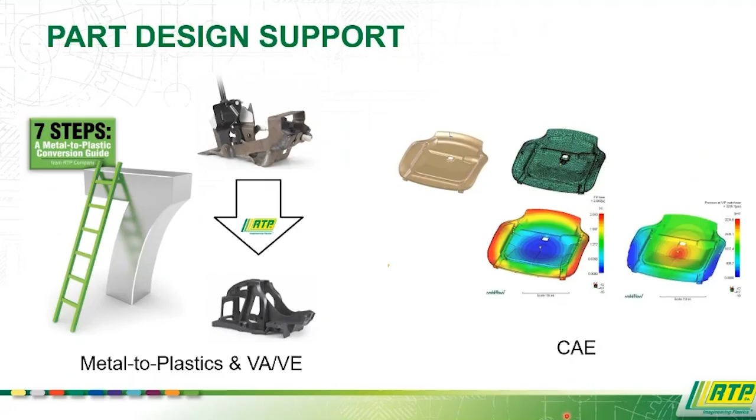I know there's been a lot of information, and I'm just scratching the surface with one of our many product groups. There's many more technical resources at RTP Company to take advantage of, and we love to share those resources free of charge for our customers. We do regional technical workshops, we can come to your location, or we can host you in any of our locations. One very well-received way of doing that is our lunch and learns, where we'll cover a couple topics over a long free lunch for employees, which is a good way to increase attendance. I do a lot of those myself. Really a great way to inform people new to the industry, or even people that have been in it for a while, about what's out there with thermoplastics, and things that can be done.

And a lot of times that'll end with a great discussion where you start spitballing, oh, hey, I had this problem, what can we do to solve that? A lot of things get done in those types of meetings.

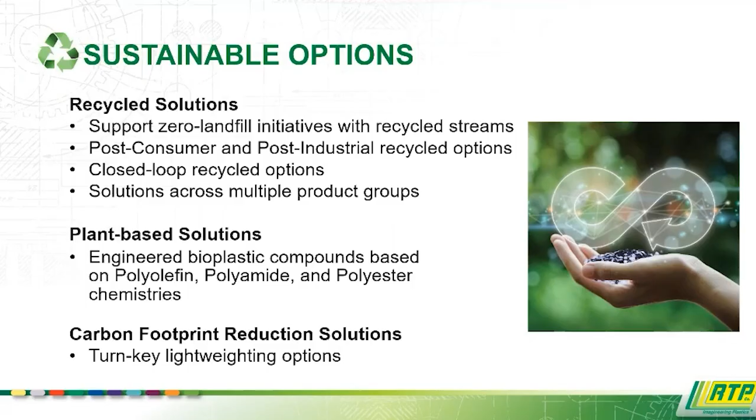Finally, I'm going to close on a topic that seems unavoidable in any discussion these days, and that's sustainability. It's becoming a key driver in some market segments and more and more prevalent. We have solutions for those needs, including recycled solutions, post-consumer, post-industrial recycled, plant-based or bio-based solutions including polyolefins, polyamides, polyesters. And if you're looking for ways to reduce carbon footprint, we have a range of options for that as well. So if sustainability is a hot topic you're pursuing, we definitely have solutions for that.

To close out, we really do best as a company when you're a partner and solutions provider. Specific to tools, we have plenty of technologies and solutions. I'm just talking about structural today, but with all those other product groups, conductive, flame retardant, the opportunities are endless for our solutions to help you out. We have as diversified a product portfolio as anybody out there. We have the technical expertise to support that, global production and support, and along with the technical expertise, we're a big player in high volume, very competitive markets, and we love to play there. So don't count us out if you think we're just the specialty compounder. We can compete with anybody.